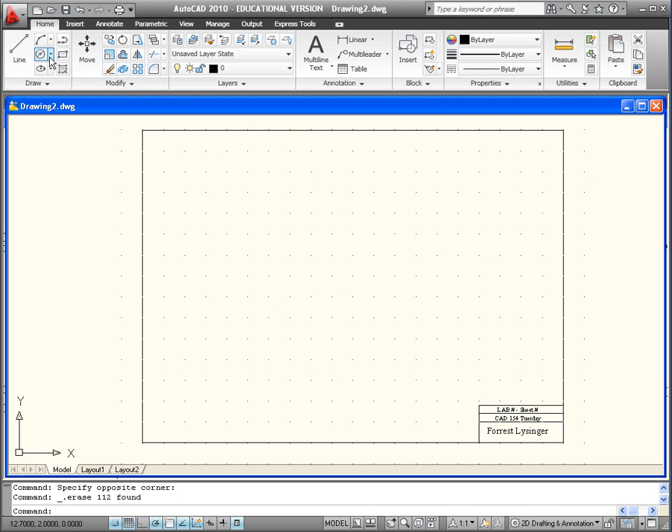For our first sheet in this laboratory, we're going to draw a brake rotor. It's going to start with a circle. We're going to do a center diameter circle. So select center diameter, enter the center point 4, 4, and the diameter is 5. So that's the outer portion of it.

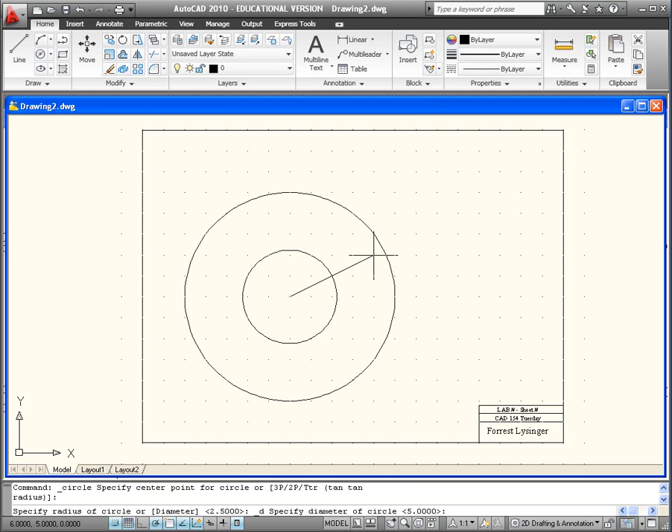The next one starts at the same center point, and the diameter of this one is 3.241, and the inner hub diameter on this is 2 inches. So there we have our basic start to the rotor.

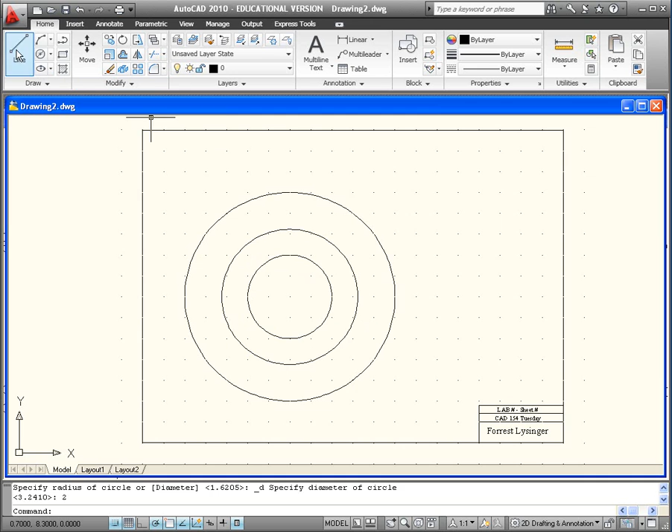The next thing we're going to do is we're going to put the 6 bolt holes in that go around the center. So I'm just going to go up here, grab a line, start at the center, and I'm going to draw up, since their spacing is 1.3 inches, and I'm going to use a line to locate that for me. The outer countersink for that is 1/2 inch in diameter,

and the inner portion of the hole, you'll have to enter this number, is 0.281. That's a clearance hole for a 1/4 inch fastener. So now we've got that in here. The next thing we're going to do, we've done before, we're going to use an array. So we're going to come up here to the modify panel and select array. It's centered about 4 inches and 4 inches.

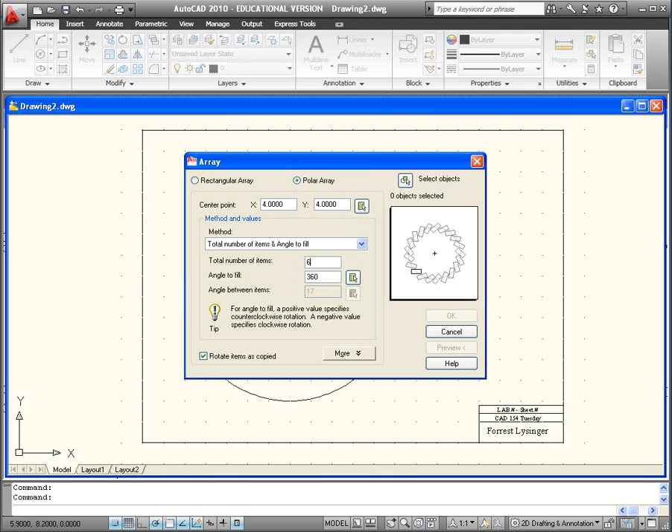Our total number of instances are going to be 6, and we're going to select our objects. So if I turn off my grid snap, it'll be a little bit smoother selection. Select the 2 circles, hit enter, click OK, and we have the bolt pattern for our brake rotor.

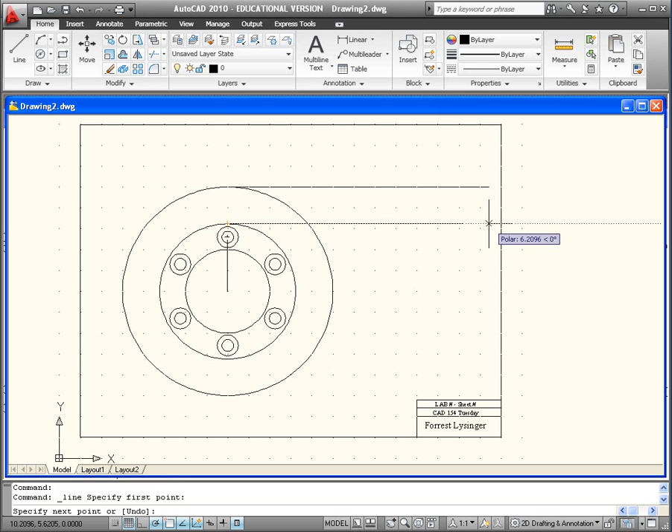The next thing we're going to do is somewhat tedious. It's a trimming exercise. So we're going to move over here, we're going to create a section view on the right side for this. And the way we're going to do that, we're going to start by creating a bunch of lines that come across to represent each of the edges that we'll have in that section view. Or hidden line view, I'm sorry.

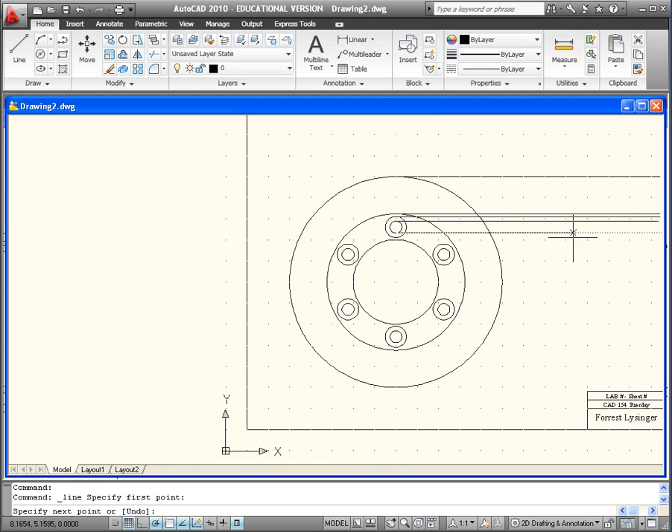So I'm just picking up each of my edges. I'm going to delete that line out of there now. So I'm just going to pick up each one and come over here to the side. There's an X-line command which is very useful for this, that we'll get into either later this lab or next lab.

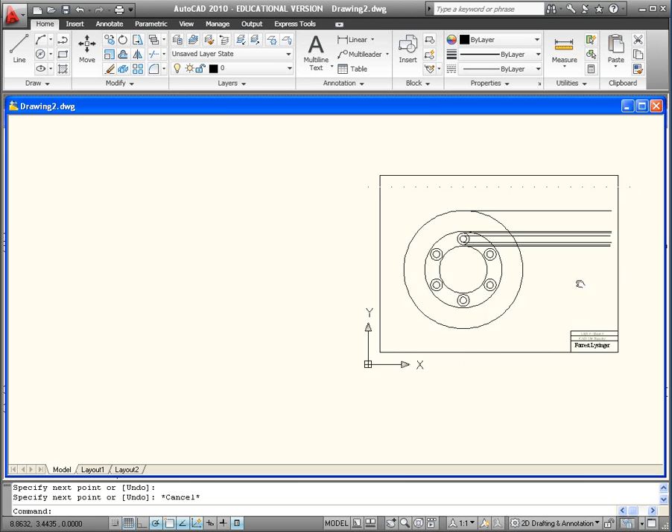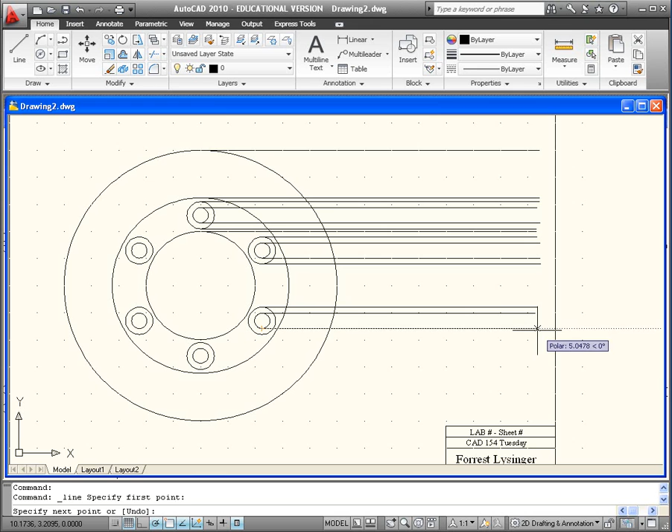So I got down past my first hole there, and I'm just going to keep going, putting these lines in. You can imagine we're going to have a lot of lines here, so we're all going to be excellent trimmers after this exercise. We're not going to do this, obviously, with the cross drillings in the rotor, so that's why I have left those off at this point. That would be quite tedious.

Forgot my inside hub line there. Okay, I think I got them all. If I missed any, we'll find out when we start over here. Next thing I'm going to do is I'm going to put a vertical line in to start my... Turn my snap back on before I do that. There we go.

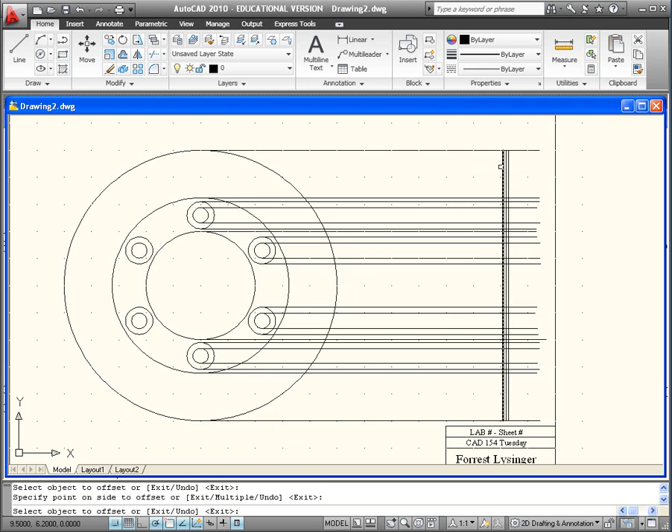I'm just going to make quick use of offset to get the other lines that I need over here. So I need my spacing to be 50 thousandths. Hit enter. And I'm going to offset this guy. I'm just going to do a bunch of these. Go that way. Basically, I need 5 vertical lines over here. My snap's interfering at the moment.

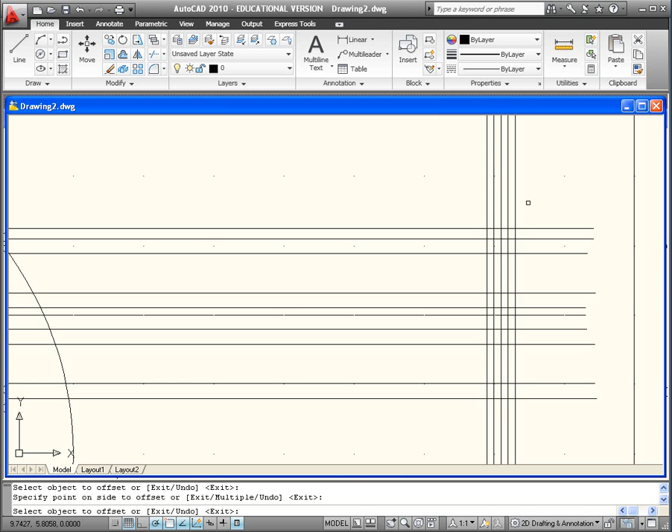Okay, now the reason I need the center line, this center line will give us the hole depth for our countersinks. And now it's time to have some fun with trimming. So we're going to come up here and select trim. Now remember, if we hit enter after we do that, then we're in power trim mode. So we're just going to start clicking on lines and making them go away. So I can get rid of all of those. I'm not going to get rid of the rotor side lines yet because they'll still come in handy.

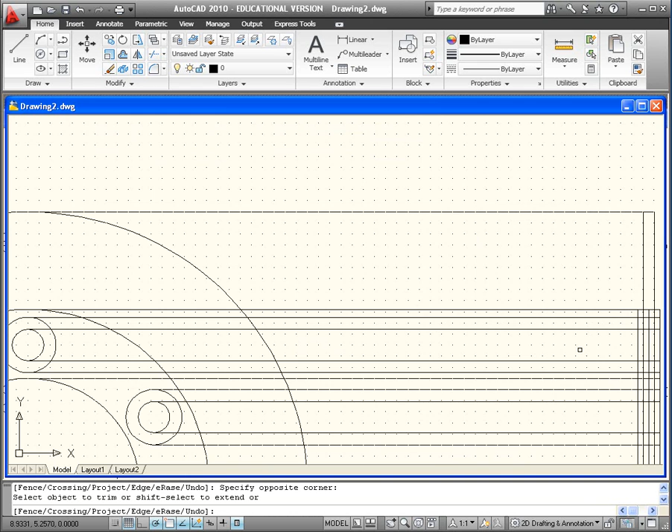Alright, so now we'll go over here and we'll kind of look at what we need to get rid of. So it looks like we need to get rid of all of these and that one. And then we're going to get rid of those, these, this guy, these here, just that one there, and then each of these in here, that one.

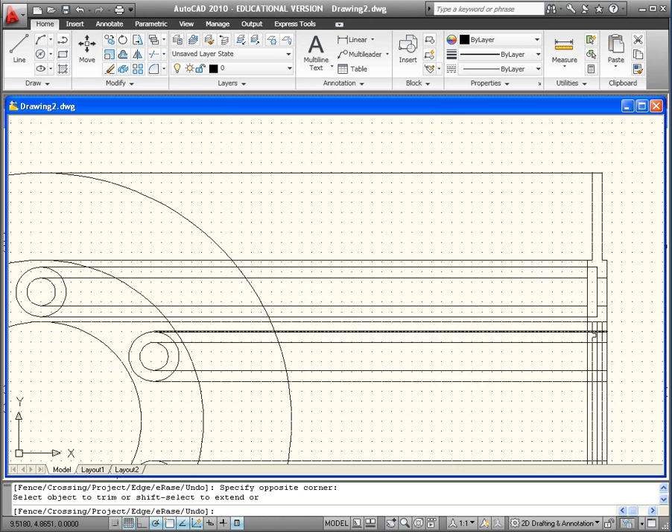And if you look, now you can kind of see the cross section where what'll be our hidden line view of this hole, and this top edge comes over to here. Now, between there and there, that needs to be trimmed out. So these 3 lines will go away, as will those there. These. This one. Well, let me trim that one aside. There we go. This one. Take out these guys.

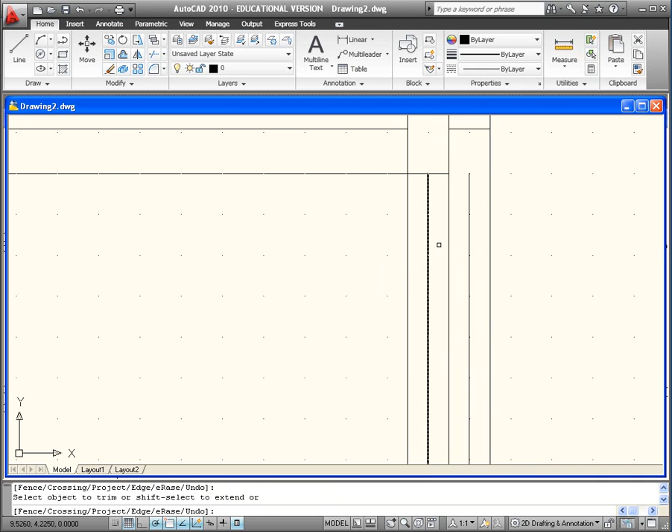Trim out this line. There we go. It won't let you trim them if you can't see the cutting edge on the screen. Now, I accidentally killed my middle line here, so I got to get him back. So I'm going to stop trimming.

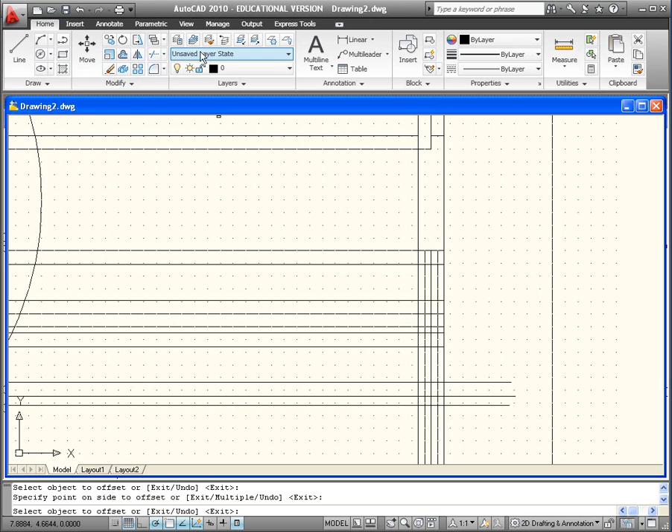I'm going to come up, I'm going to grab the offset, hit enter, select this line, go that way. I need that line back because that's the bottom of my countersunk holes. I'll go back up, select trim and enter, and we're going to continue. So I get rid of, that was a mistake, Control Z. Trim, enter.

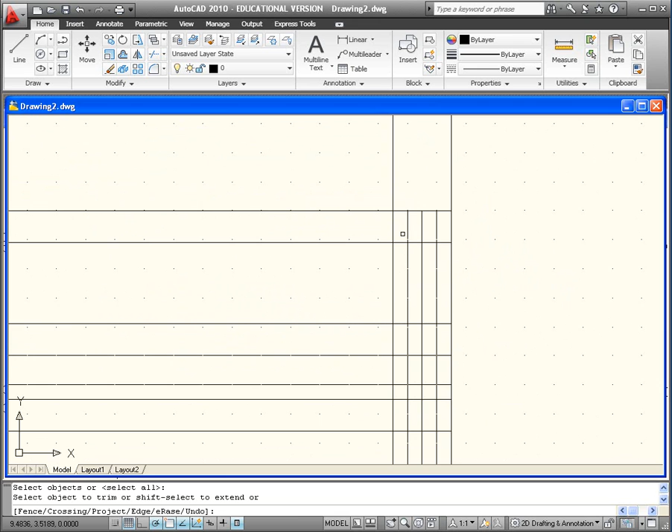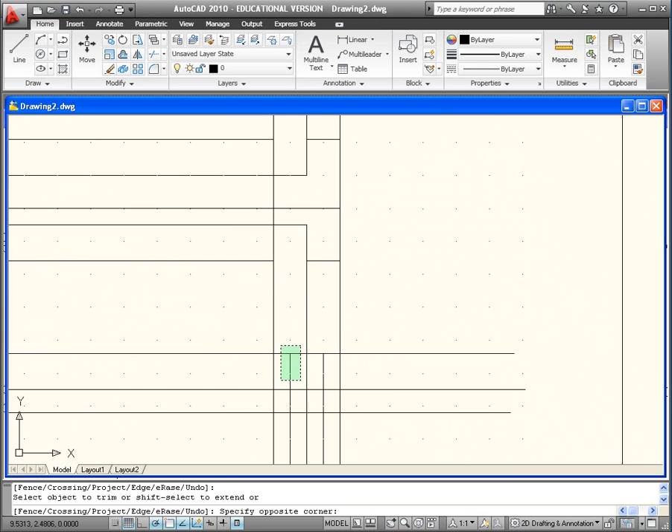Zoom in here, I want to get rid of those, and this one, goes there, all of those. This line here is the inner hub, so we're going to keep that line, but all these can go. Those 3 go away, these go away, that one, those 3, those there, these 2,

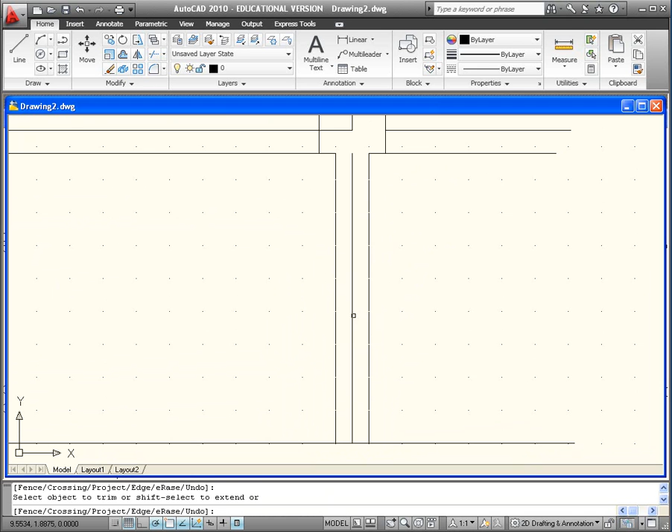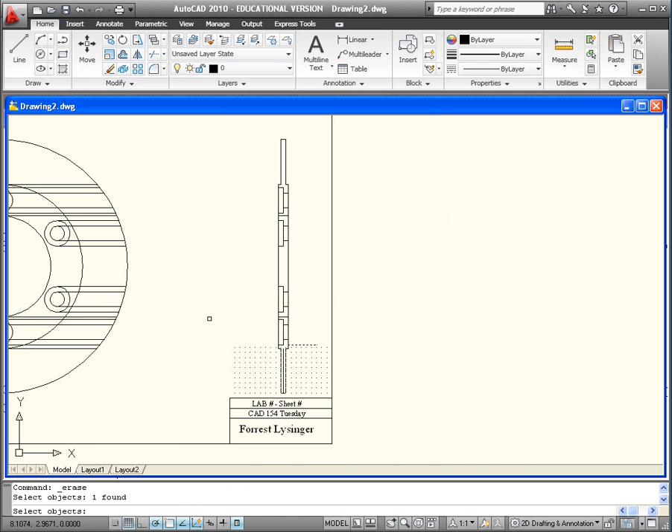And then the next thing we're going to do is we're going to use the erase command. So we're going to come up here and select erase. And then when you erase, if you drag a box down and to the left, it doesn't select. But if you drag a box up to the right, it does. So up to the right, not down to the left. We're going to go up to the right. And we'll get rid of all these other lines we don't need now. And hit enter. Oops, I forgot one.

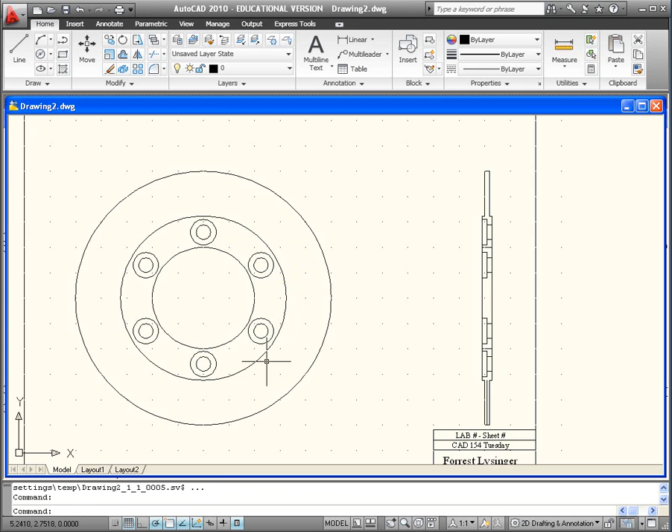Okay, so now basically what this represents over here, we're going to change these lines inside here to hidden line type later. But right now you should have your rotor and your side view with hidden lines. The next thing that I'm going to do is I'm going to put in the 21 rows of holes on here.

So the next thing we're going to do is we're going to draw some more lines to give us a point to put our cross drill holes. If you turn your snap on, it'll make this easy. So that line needs to be 2 inches long. We'll come back up here, grab another one up here. We're going to go out 3 clicks and down 2.2 inches. And up here we're going to go over 3 clicks and down 1.8 inches.

Last thing we'll do is come up and grab our circles. Again, your snap makes those real easy. Those are 0.200 diameter circles. So come down here, draw my

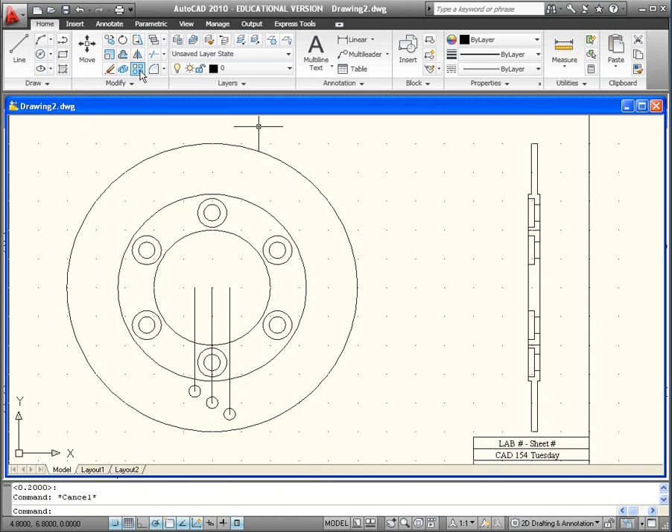all right, now the last thing, we'll go up here, select array, polar array, and we're going to select objects. So we want to turn our snap back off, grab this guy, this one, and this one, hit enter. Our center's already selected from the last time, but we're going to change this to 21. Total number of items 21. Hit OK. We have our cross drilling.

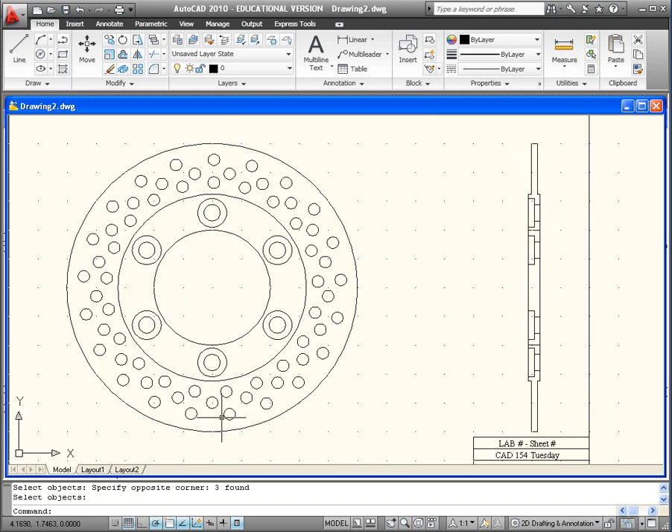Go back up here, select erase, drag down to the right, up and to the left, hit enter. And we've cross drilled our rotor. So the last 2 things to do with this will be changing the line types over here for the hidden lines and adding all the dimensions that you see on your sheet.